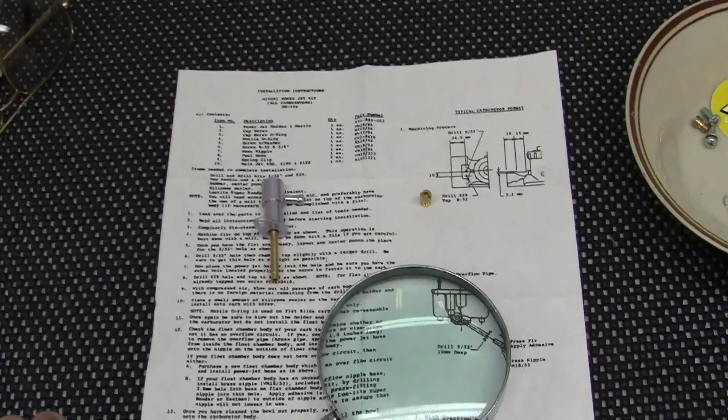Now the trick on the carburetor, or the theory - remember, if you understand a thing, then you can really get into it and see how well it works. The carburetor on a motorcycle...

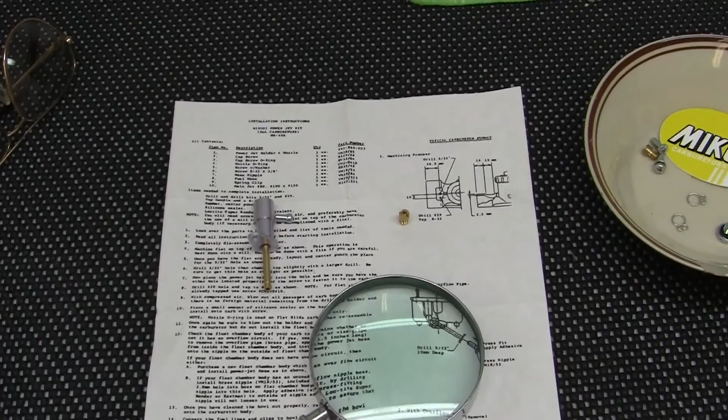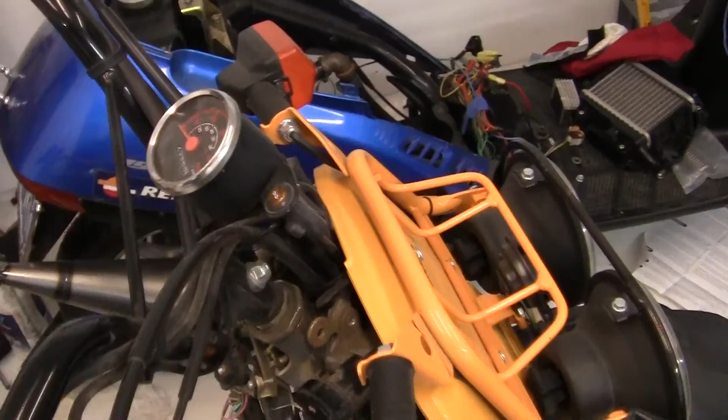Ideally should be able to put 14 parts of air to 1 part gasoline or petrol through the motorcycle engine at all speeds. Now we'll talk about 3 speeds.

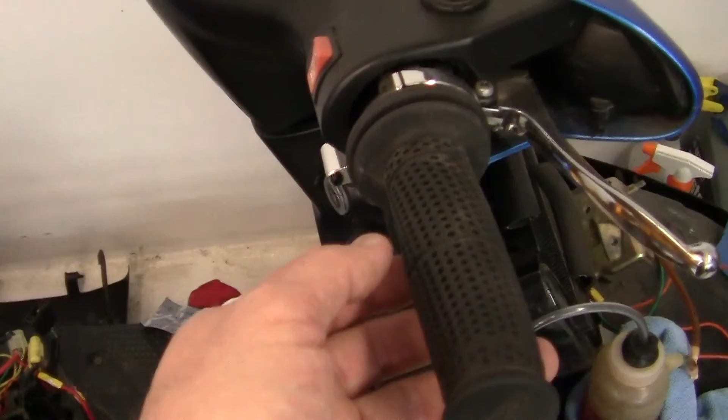Your low range, which is idle - we'll use the throttle for example - idle to like 1/3. Okay, and then you have your mid range from 1/3 to 2/3, and then you have wide open, or WFO.

WFO is a motocross term. It means wide fucking open. I like that term, it's kind of cool. I learned about that about 30 years ago.

And so if you can get your carburetor to put out 14 parts air in all of those 3 speeds - low, mid-range, and high - then you have the carburetor tuned to where you want it.

But you have to remember, I'm 210 pounds of solid American muscle, which means I'm probably a balding fat ass. But I don't picture myself that way, just the world does. But you may be one of these riders from, say, Taiwan or Singapore, where they have riders that are 110, 120 pounds, and they would fly by me like I was driving a brick. But their riding style would require them to tune their carburetors differently.

And everyone's afraid of the carburetor. It's like, oh no, I can't touch that. We're just going to forget it's there and it'll take care of itself.

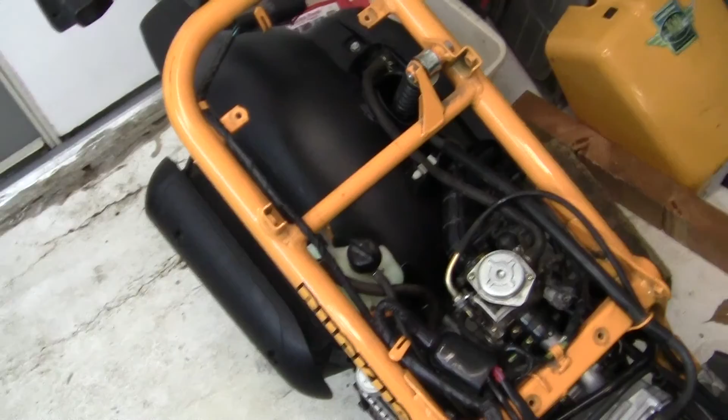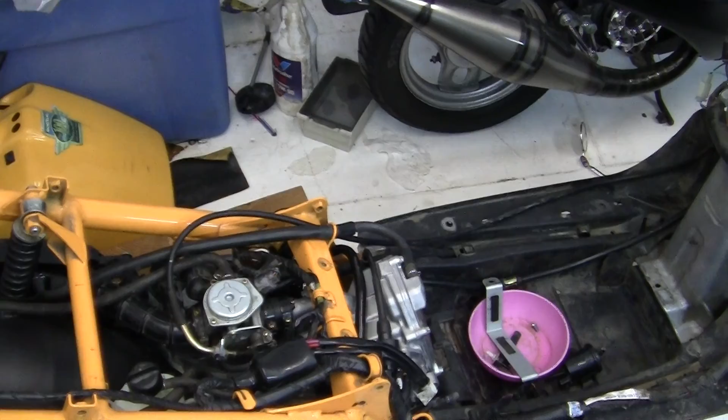I don't know if anyone knows this, but all of YouTube videos are in a congressional library. There's a copy of all of them, which means it may go on into perpetuity, whatever the hell that is. So there may be my great-grandkids watching this 100 years from now. You know, who knows?

Or maybe not. Maybe YouTube will go like Bitcoin and, hey, we just accidentally lost $45 million, $450 million worth of your money. Sorry about the inconvenience. Later. You know, that just don't cut it. But hopefully YouTube will last a long time and it will really work out.

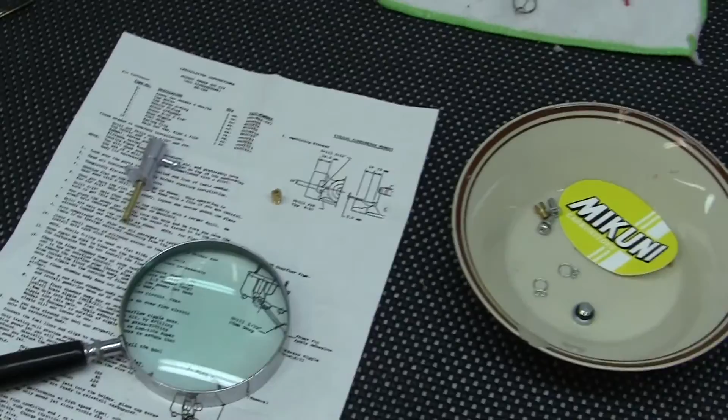So what we'll do with the carburetor is I will put on the normal carburetor, the normal Mikuni, and that's what you want to start with. You don't want to have it all fancy and tricked out, especially on race day. Don't try experiments on race day if you're a motocross rider.

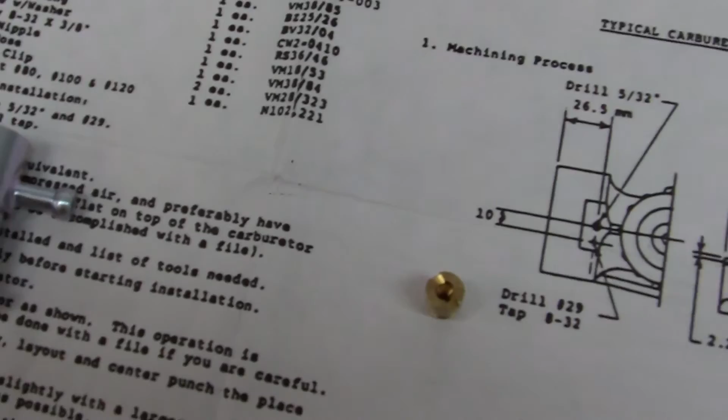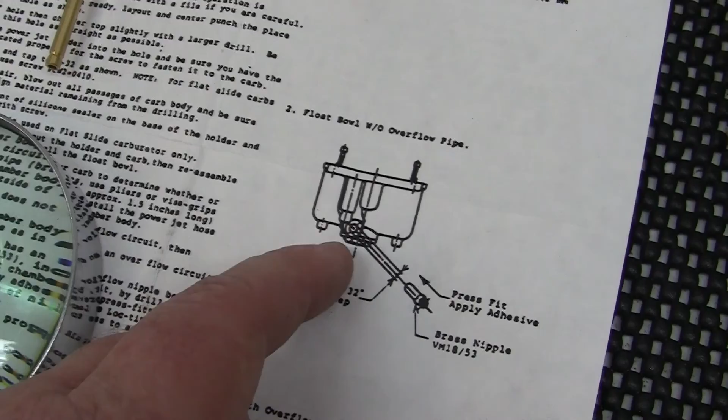But you want to put the carburetor on, see what the - if you take the float bowl off, which is right here, if you take it off, or if it has a - the newer ones have a little tiny cap in the bottom. I wish I had a carburetor here to show you, but they're at my other shop.

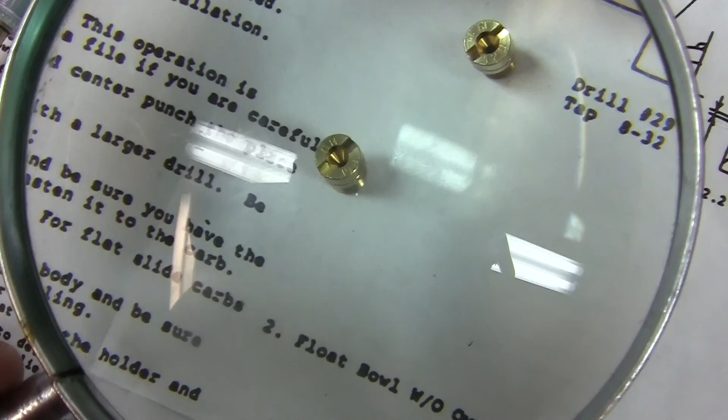You can, if you take the cap off, you can see what the number is. Like I said, this is 120 right there. The other one they gave me is - hell, my eyes are shot, I can't even see it. I don't know what it is. Oh, I think it's a 140, maybe. I don't know, sounds reasonable.

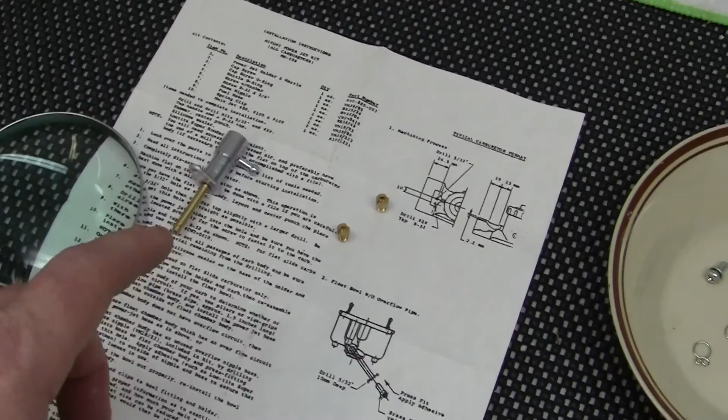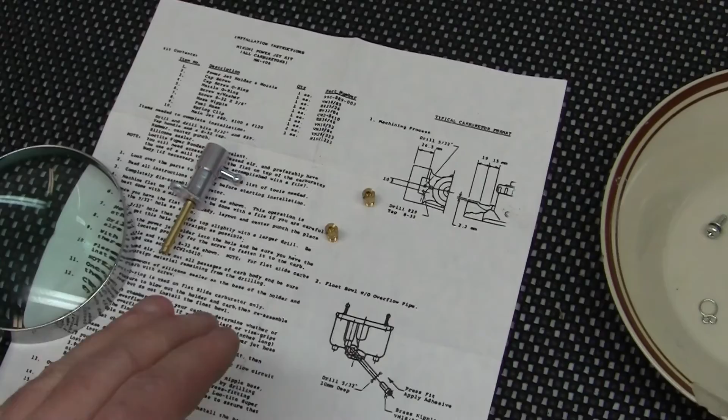The way this works is that let's say we have a jet that's 100% - I mean, we have one jet that's working perfectly for the bike, but we just want to make the high end better. So what they suggest I do is take this 100% jet that's giving 100% fuel, the right fuel, and take the main jet that goes in the carburetor, and make it 20% smaller, so I'm using a jet that's giving me 80% of the fuel that I need.

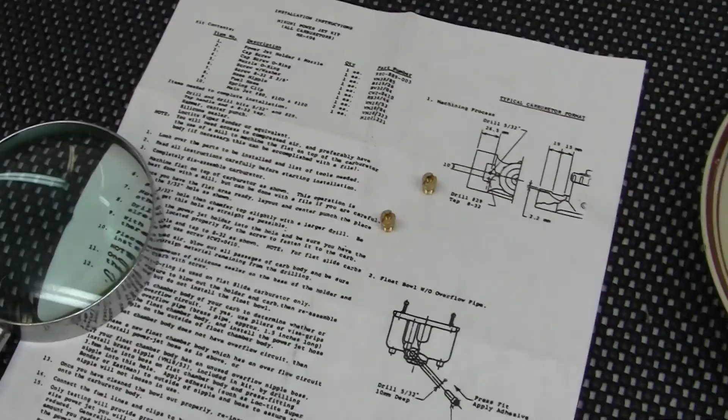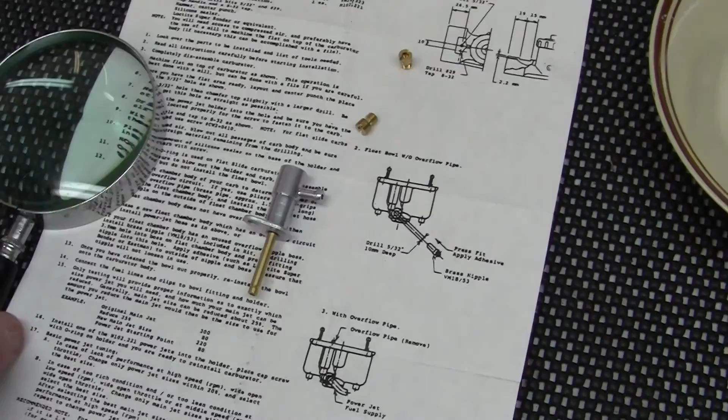Then what they want you to do is take this power jet and put in another jet which maybe gives you 30% of what you need. So if you add 30 and 80, you're looking at 110%. The trick is to have the power jet work and give you good performance in all the ranges of your riding style, and we'll go through that.

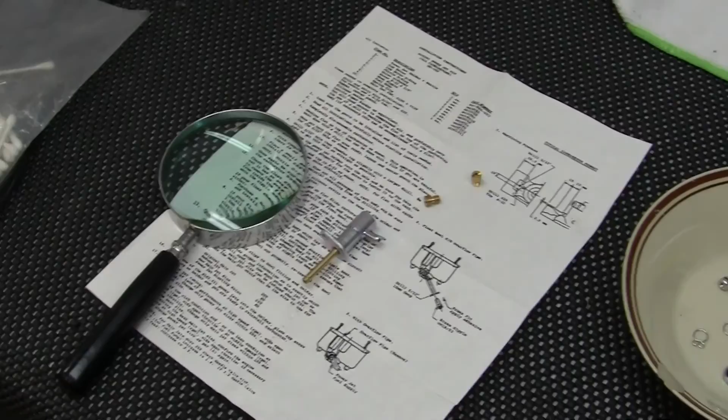I hope I'm not boring anyone to death. I don't know, I like to talk about what I'm doing, and I hope that somewhere down the line, maybe this will help someone else. Maybe it'll help some kid out there that's not even born yet.

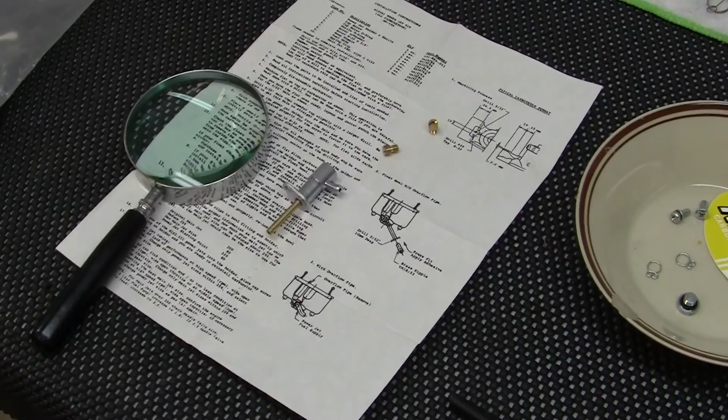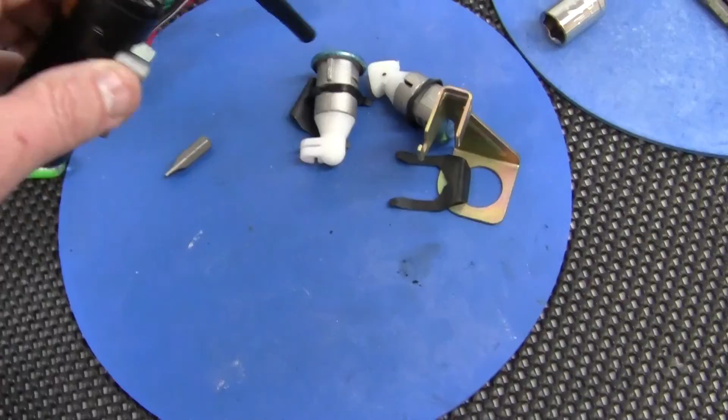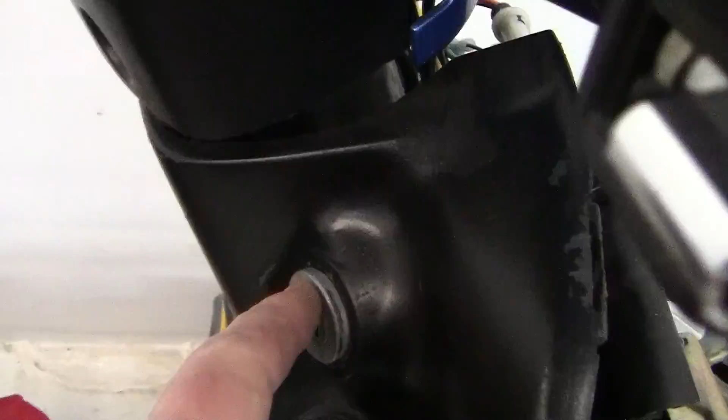So, you know, that really makes me feel good. Another thing that I'm going to do is that I went out and bought this on eBay for 15 bucks, if you can believe it. This is a Honda Dio ignition cylinder. You can see the outer side, but this is over 20 years old right there. That's the outer side. This is the inner workings right here, and you can see how close it looks.

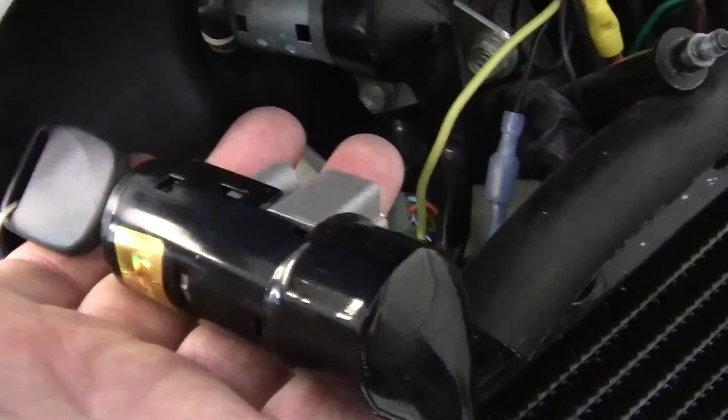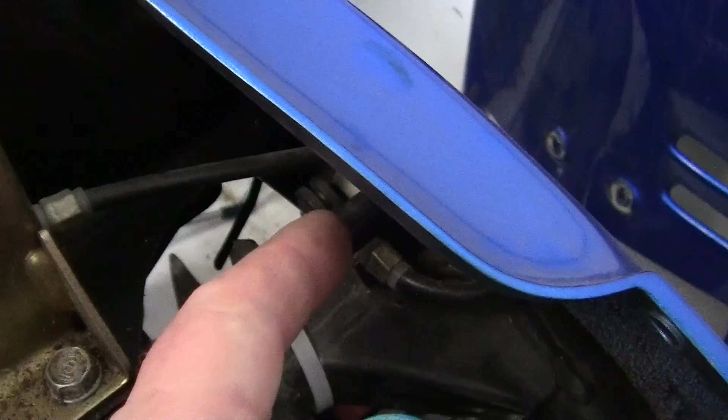And they give you this ignition, 2 keys. Now check this out. They also give you the key, the lock to the lock box right here, and one that goes right here underneath the seat. And guess what color it is? It's the same color blue. Isn't that cool or what? This one's got some scratches in it. It's kind of pissing me off. But for the money, I can't complain.

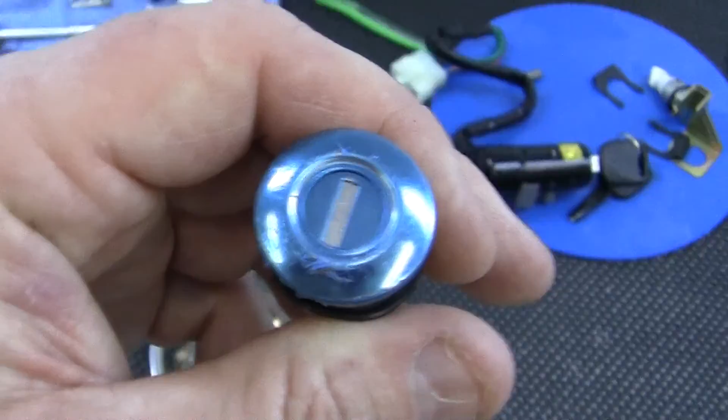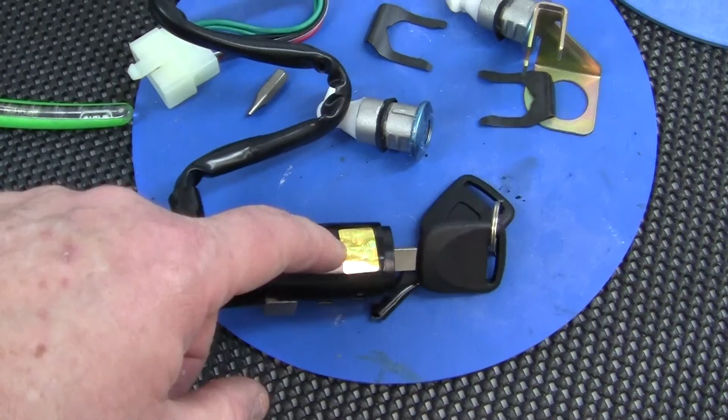And maybe, you know, my bike's not working totally correctly because maybe the ignition's old. I mean, you have to remember, after so many years and thousands of miles and turning keys, it does get kind of old. But that's the fun I find in working on the little bikes.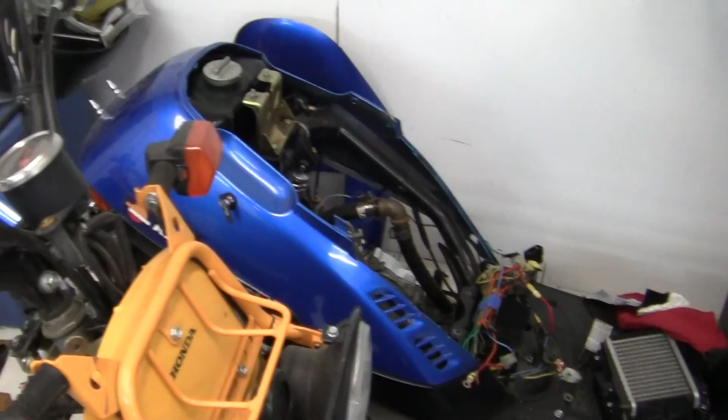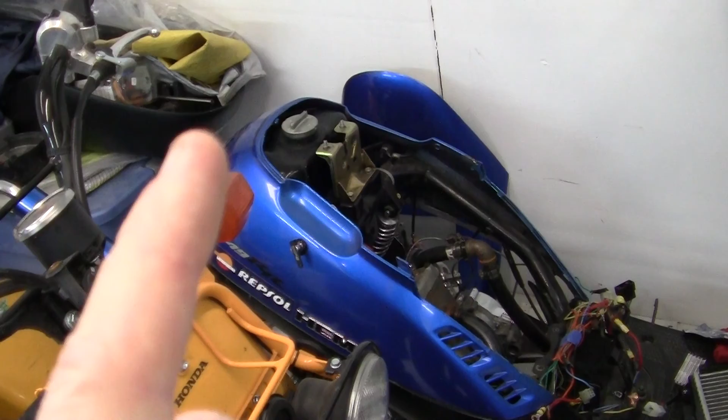Another thing too is that now that I'm older, in my 50s, I don't have to have the newest, best iPhone, the fastest little car, the best clothes. Let's face it, there's not a whole lot of 55-year-old women out there that I'm going to go out and try and impress. Except maybe one. But that's a whole nother story. That's a love story. And maybe one day that'll work out for me too, if I have enough patience. Who knows?

So, anyway, I hope you like my videos on my little Dio. And it's like Dave Toba told me one time, and I believe he's a 2-stroke builder in Hawaii. He builds really fast, or owns a machine shop. He said, you know, Randy, I know everything about these little bikes because I've spent years working with them. But I wish I was at your stage where you're just discovering all these little things that are opening up. And just the discovery of learning, which was so fun. And you know, he was right.

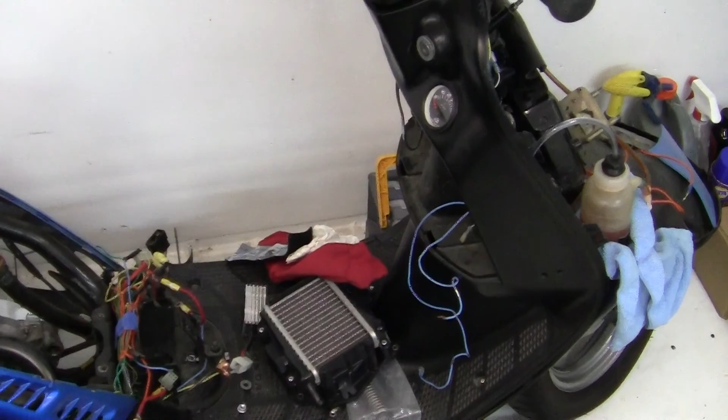He was exactly right. And that's another gentleman I would like to meet if I ever go to Hawaii, which is about, I don't know, 5-6 hours away. And I would just love to go over there and shake these guys' hand, buy them a beer, take them out to dinner, and just say, you know, thank you. Thank you for taking the time to help this old white guy just play with this accidental hobby that I found.

So anyway, if you like my videos on the Dio, which is generally what I do, it's called a Dio outside of the United States. Inside it's called a Honda Elite. The motors are a little different, the ignition is a little different, the body panels are a little different, but I call it a Dio because that's the worldwide name, and it sounds cooler than Elite. And they don't even make these anymore since this is 1994. They stopped making them in, I believe, 2001. It's even hard to get parts on them.

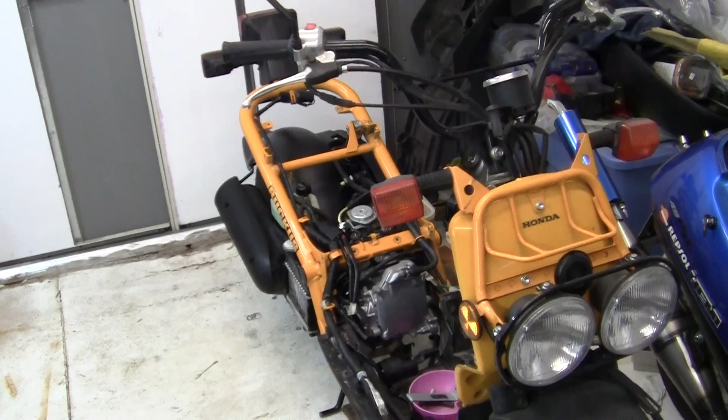And I hope you've liked my Honda Ruckus rebuild videos. I really thank the owner for coming up to me in September and saying, listen, you know, can you do a total rebuild? And you can make as many videos as you want, and I'll be back in the spring, you know, could you do it? And I wasn't sure, and I'm just glad he gave me the chance to do that.